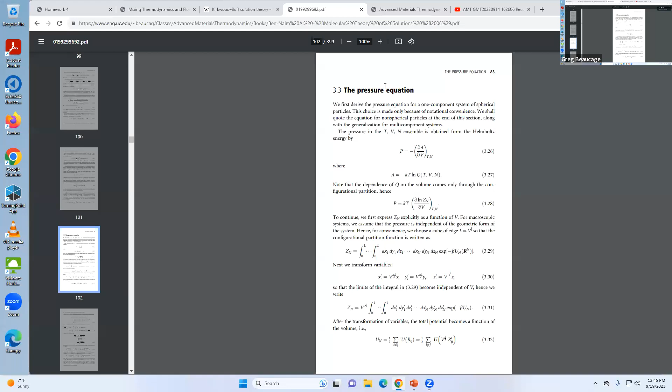But if you want to see how you get the free energy from the correlation function, the first step is to get the pressure, which page 83 does. And then he goes through the whole nine yards of it here. It might be interesting to look at, but it's not really necessary. He actually has a chapter, I think it's on page 111 or something. So if you want to know about correlation functions, this book is pretty good, but basically, unless you're doing computer simulations, you might not need to know about correlation functions.

The other place you might see them is in thermodynamics from distribution functions. That's section 105, which basically answers question 1 if you wanted to, but it's a book, so you couldn't really put that in the answer sheet. So anyway, the other place for correlation functions: the Fourier transform of the correlation function is like the diffraction pattern. There's a couple others, but basically simulations is the main one.

Like you're stuck, you have molecular dynamics, it's easy to do, plug and play, you let it cook, it comes out with the answer. Then what do you do with it? So then the next step is get a correlation function. So it's a way to get an answer from this kind of video game kind of thing, in a sense. I mean, it's nice to see a movie of the molecules moving around.

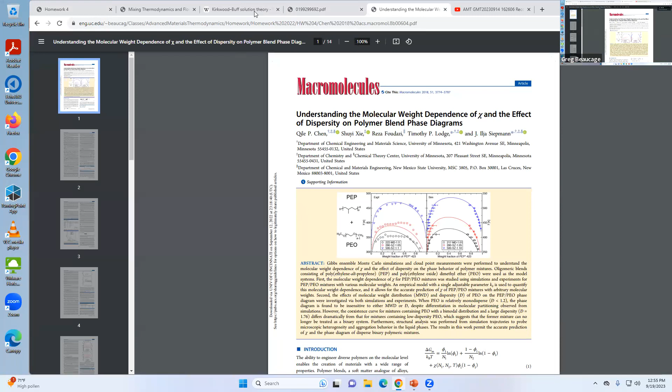Well, no, you're right that Chen's talking about molecular weight. In fact, the paper I gave you, I don't think it's this 2018 Chen, right? I think it's a different Chen. Is this really 2018? Yeah, but the Chen that he references isn't this Chen, I don't think. So he's saying Chen et al. Is that 2018? Because this Chen isn't talking about the same thing. It must be one of the first references here, right?

Oh, it said right there what it was. Chen et al. 29. A lot of Chen here. So it is that paper. The paper's different, right? He's not looking at the same system, even, I don't think. See, he's doing PEP, not polyethylene. So it's polyethylene propylene. That's called EPR, ethylene propylene rubber. So you have blocks of ethylene and blocks of propylene.

The propylene crystallizes; the ethylene, if it's small enough blocks, doesn't. So you get rubber reinforced polypropylene. And you can extrude that, so it's a rubber you can extrude. You can injection mold rubber parts with it. And it's just polyolefins, so it's cheap. That's a popular polymer, but that's not the same. He's doing polyethylene without the propylene part. Somewhere in here he must say without the propylene to compare it, because he's taking data out of this to compare.

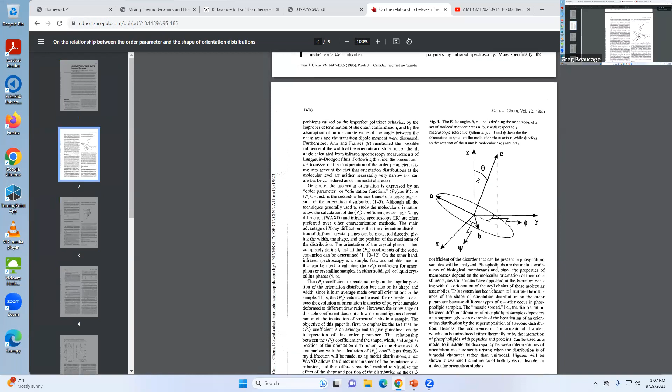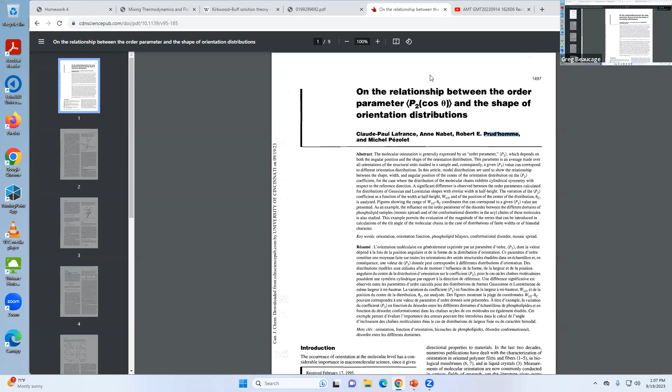So who did this? Someone that had a lot of time on their hands. Oh, Laval. Okay, I know this guy Prud'homme. He's retired now. He moved from Laval to University of Montreal. He wrote a paper on it, I guess. What journal is this in? Printed in Canada, so it's the Canadian Journal of Chemistry. Prud'homme's a really nice guy. There are two Prud'hommes. One was at Princeton, I think he's still alive, a polymer rheologist. And this Prud'homme was at Laval, a French-speaking Quebec City university.

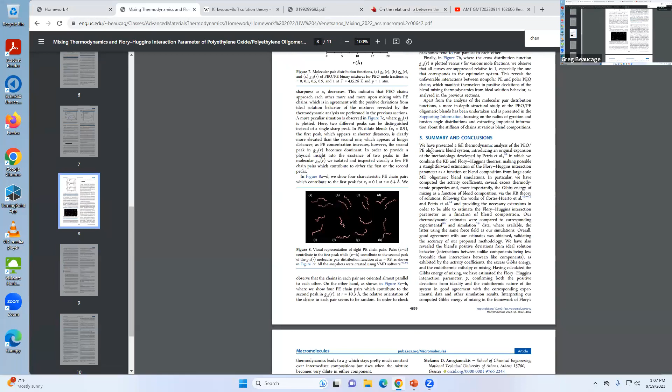Then he moved to University of Montreal, also a French-speaking place. But anyway, French people like French people, which is always odd because I'm like 1/4 French. So I don't really identify much with it, but if you go to New Orleans or Baton Rouge, all of a sudden you get the best hotel room, everyone treats you nice, and it's really pretty weird. Same in Montreal or Quebec, you go up there, all of a sudden you're special.

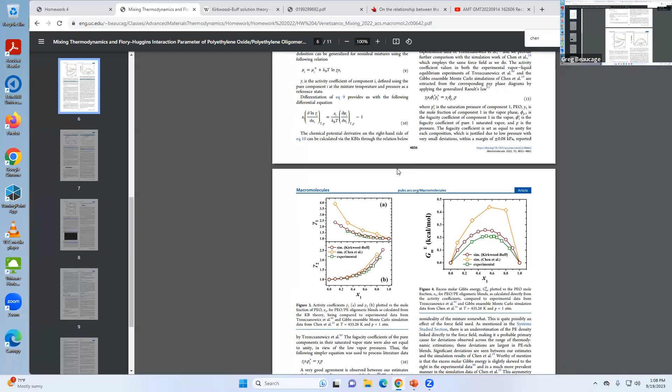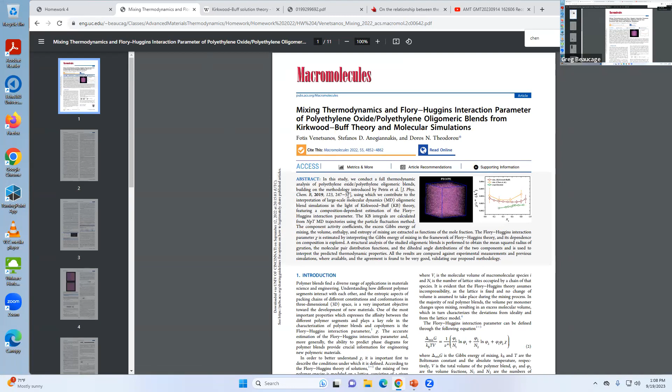So anyway, any questions on that? Anyway, everyone did bad on it. A couple people got over 100 slightly, but they also lost points on other things. Like for this business, there's a plot of gamma versus composition in every paper and also in the notes, where it shows the intercept at 0 gives a 1, and then the intercept of the other one's Henry's law. So you need to just say Henry's law, Raoult's law, and show that plot. I gave them 3 extra points for that because it was exactly the way I would have answered it and the way I would have wanted them to answer it.

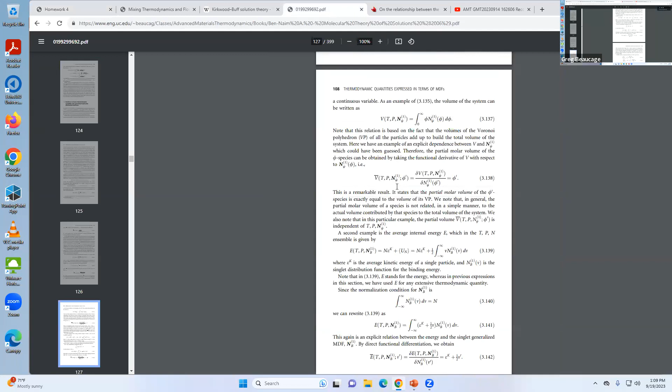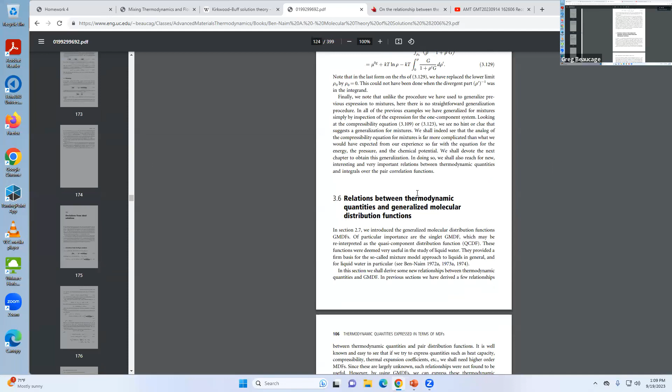Even if you look in this, I noticed this name NAIM, I guess that's how you pronounce it. He's got those plots in this book too, the plots of the gamma versus composition, showing the Henry's law and the Raoult's law limits. So literally everyone shows that plot to answer that question. One group did it, so I gave them some extra points. You didn't have to, but basically that was an exact answer. And someone else got extra points for something else like that. So that's about that. Any questions on this stuff?

So, right. So anyway, we got phase diagrams. This is the eutectic phase diagram. That's the workhorse, the bread and butter phase diagram. So the question is partly, where does this come from? In other words, we've done this ln x thing with some interaction parameter, an entropy, enthalpy equation for mixing of things. And then all of a sudden you get this thing that doesn't look anything like it, right? Nothing to do with it at all. So surprisingly, you can get this thing from exactly that same simple approach.

What you do is write the free energy for each of the different phases. In this case, you have copper crystals and silver crystals, both FCC. They don't co-crystal. You can't put the copper into the silver crystal, so they don't make a solid solution. It's possible to have a crystal where one metal fits into the other because the sizes are within 15%, and a couple other criteria, and then you could have a solid solution where you throw in as much of either as you want and have a single crystal structure. The lattice spacing changes a little as you change the composition, like brass. Silver and copper don't do that. The two crystals are separate. They're different sizes. They don't fit together.

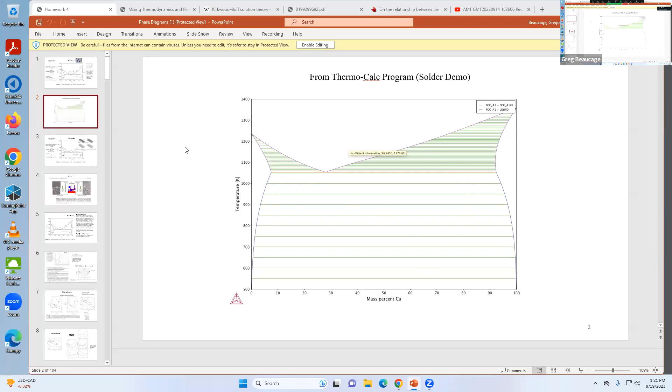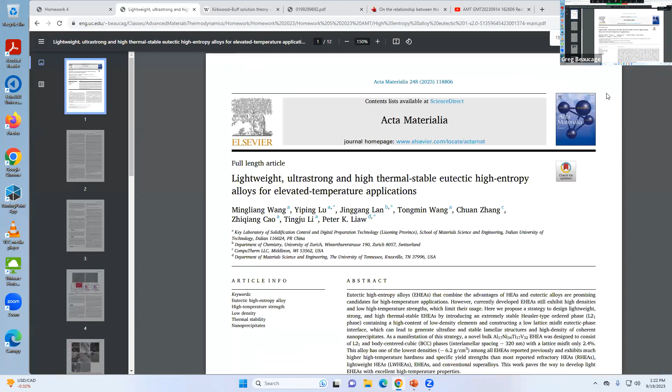Let's see, I wanted to show you some more complicated phase diagrams. I know there's some in here. Well, there's the high entropy alloys in this paper. These are things I was looking at for the homework. High entropy alloys, it's the same thing. It's got 5 components, same stuff. 4 or 5 components, I think you have to be 5.

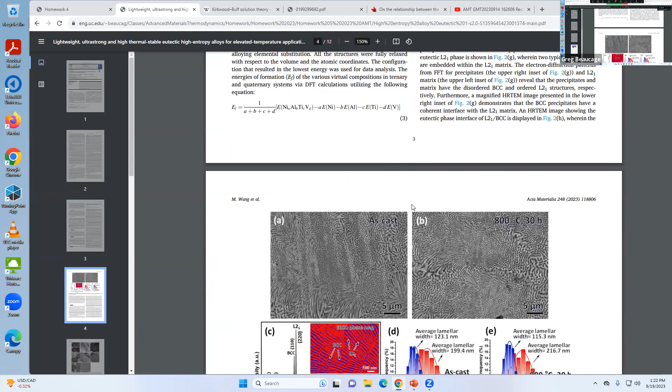Anyway, so this is what you get. This is a eutectic composition. When you get to the eutectic composition, you get these weird striped, or needle-like, a variety of tiger skin looking structures. So you can tell when you're at the eutectic. If someone asks what composition this comes from, you can say this is from a eutectic phase separation. Because at that point, let's see if I can get back to this guy here.

So at the eutectic, you don't have like a matrix of one and a matrix of the other. You're making both things at the same time. Right, so you're going directly from liquid to the two things. So there's a diffusion issue. You're going to have normally fluctuations of copper and silver, regions where they're higher density. And then when you get to the eutectic, all of a sudden it just wants to, boom, go to

these two solid phases. So the atoms of copper and silver have to diffuse over to find their partners and then form up the phase. So there's a kinetic issue of them getting out of the way and then forming these structures, right? Equilibrium structures. So how fast can they get to those things?

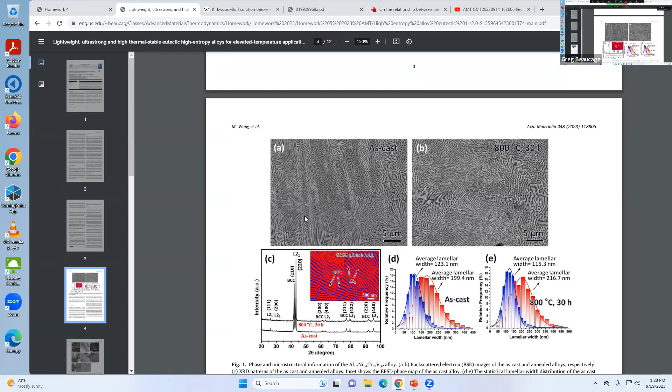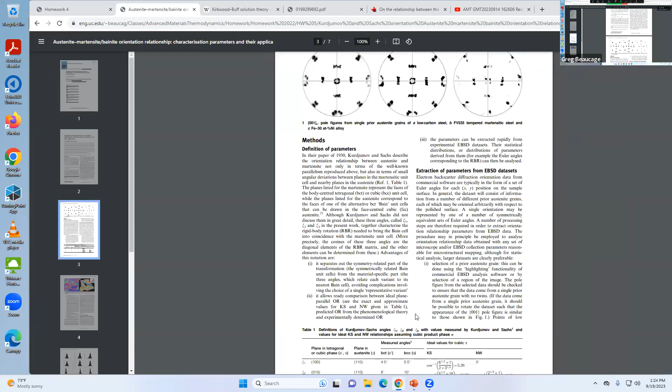So anyway, I'm not sure if the phase diagram for this thing is here. This should be a complex phase diagram though, but let me show it. They show a eutectic in it, but I was searching for eutectics. I got these weird... Somewhere in here, there's some really complicated phase diagrams. Let me just look for a second.

Anyway, the eutectic's the one, like if someone asks you questions, that's the one you absolutely have to know. Just the steel phase diagram is pretty good, but I don't think I have it here. Not sure why.

Right, so this is an important one because it's how you make steel. You put a little bit of carbon in the iron and make something nicer, right? Harder, less prone to corrosion, things like that. You put some chromium in. Anyway,

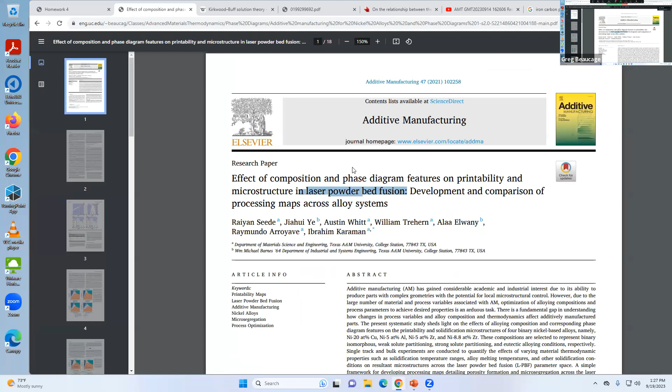So basically, these things are like magic compositions where the thing clicks together. And at that point, it's as if it's a pure component. So the intermetallics are all over the place in this phase diagram. In this paper, they're doing laser powder bed fusion for 3D printing. So you put the powder down, you cook it with a laser, and you see what comes out. So you can imagine you can get a lot of different phase behavior in that situation.

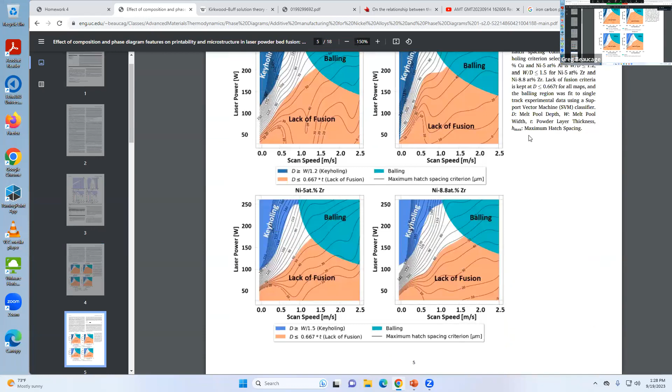So they go through different compositions to determine what comes out. They create these phase diagrams with CALPHAD or something, right? And then they go and make the stuff at that composition. So they do the kinetics and the thermodynamics together. It's a pretty good paper, but I picked a different one this year.

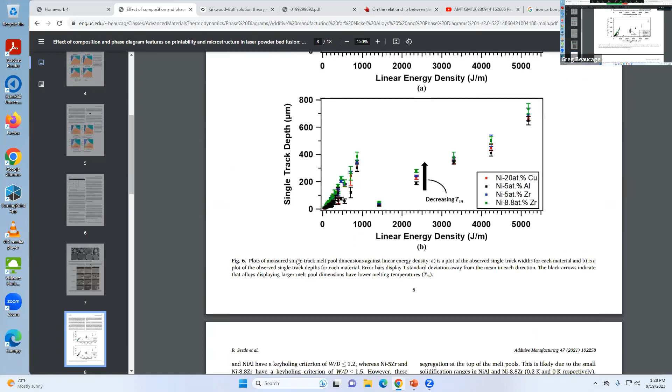So anyway, then they do polishing and they get images of it and they try to determine what's in that. You can do it optically. You can also stick this in a TEM and determine the crystal phases, and the composition, like EDX to get the chemical composition of each of the spots in it.

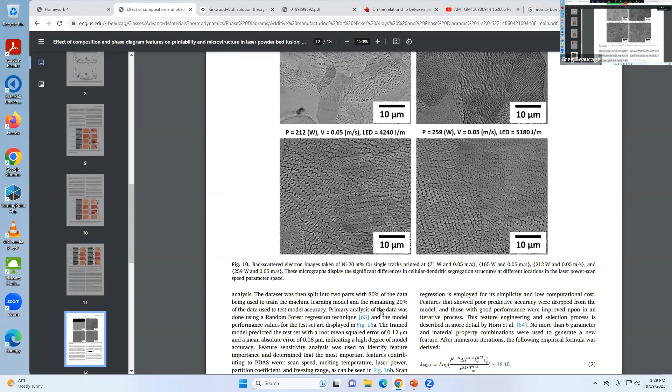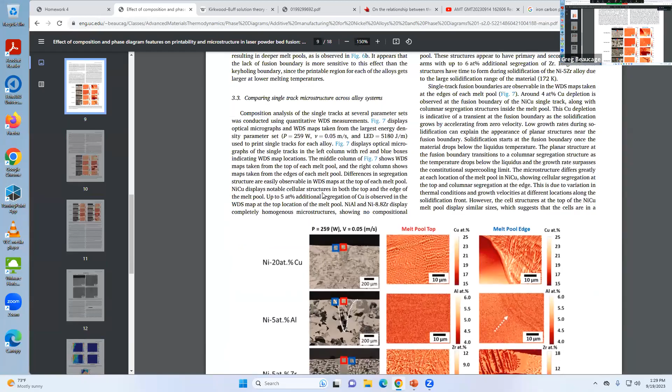So a lot of the analytics for metals is based on stuff like this, like trying to determine what phase is in equilibrium with whatever else is in there and how that thing grew. This is a pretty good example of the mess you can get into, right? And how you kind of resolve it as best you can. In this case there's the thermodynamics, which is your roadmap, and then there's the kinetics that decides what really happens, right?

So depending on what happens when you shoot the laser at the powder, you can get holes forming in it. That's not good. You want it to be solid. They can ball up instead of making a solid piece. If it doesn't melt, then it's just still a powder. So there's all these problems that happen because of the scan speed of the laser and the power that you put on the laser.

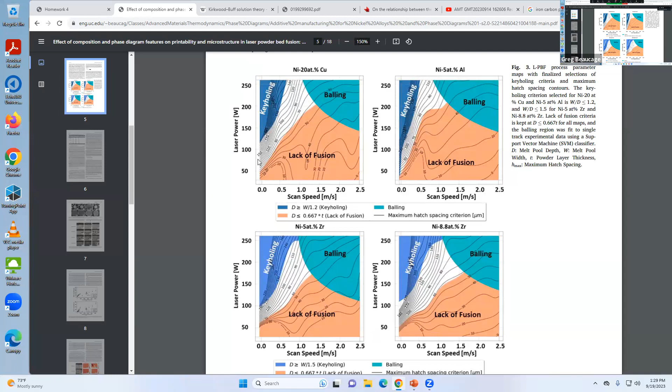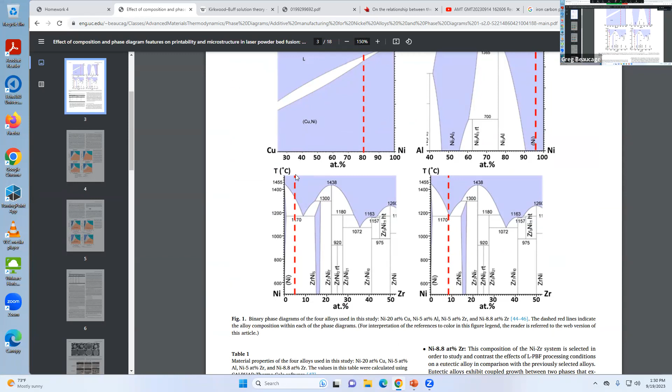So this is a kinetic mapping of what happens. You take that kinetics and map it up with the thermodynamics, and say what comes out as a combination of the two. Did I melt it enough? Did I cool it fast enough? Did I get the phases I want? Right, so anyway, that one's a good example of how things can get more complicated than this. But the eutectic is the touchstone, everybody has to know what it is.

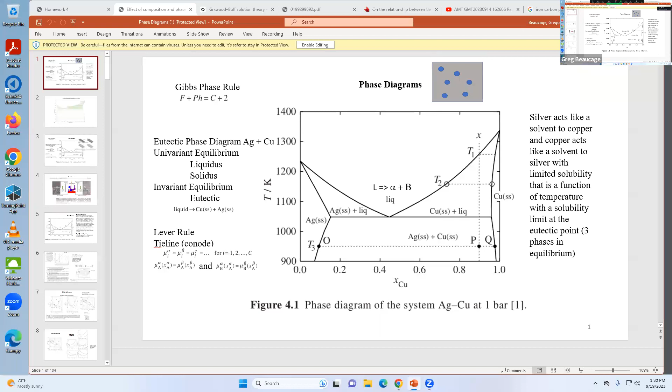Right, so lever rule, liquidus, solidus. That's liquidus. Solidus is when you get to the solid phase, so it's that line. Invariant equilibrium means you're going from this composition directly into the same composition of the two. And then lever rule, tie line. That's slide 1 of this stuff.

The flat line between the pure copper and the silver, the completely horizontal line, is that also a solidus line? Yeah, the eutectic line. I guess it's a solidus line. Usually if someone says in a paper along the solidus line, they're talking about this line. If they're talking about the eutectic, they would say the eutectic, but it is a solidus. So if it was a trick question, yeah, that's a solidus.

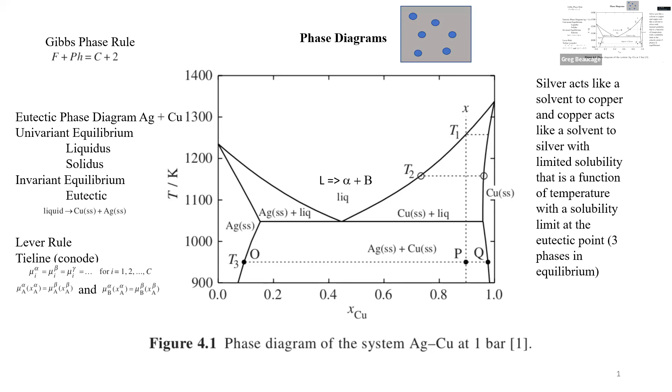So it's basically terms of the trade. In the past I've given a homework to use this, but you can play around with it. It's on the web page. With the free version of Thermo-Calc you can only do steel and solder, a couple demo examples. You can't reproduce this silver-copper thing, which would be nice. That's why I have solder here.

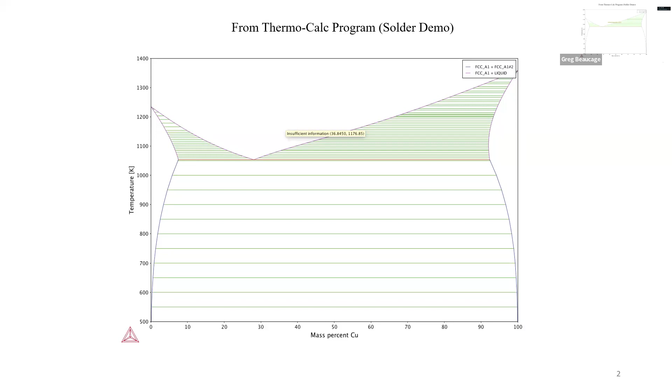So basically you have to pay something for a license to Thermo-Calc. Has anybody used it here? There might be a license for it if you want to use it. Someone has it, only Matt Steiner knows where, because I'm not a metallurgist. Peyton might have it. Anyone that looks like a metals person, ask them. But the free version is okay too, to get a feel for what you can do.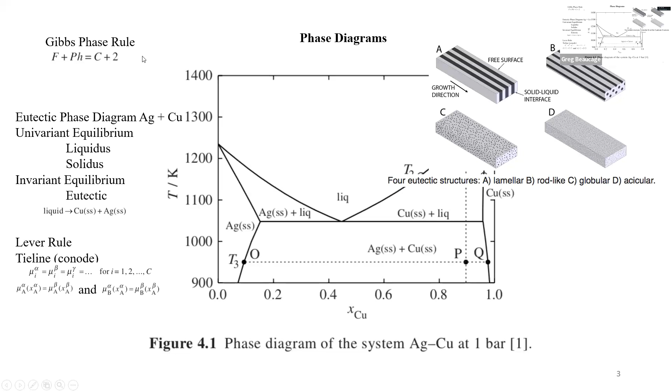This is showing what you can get with the eutectic: lamellar structures, rods, acicular, which are fibers, and globular, which is a spotted thing like a leopard skin in the micrograph. So you can tell when you went through a eutectic; there's a signature like that. Here's pictures from another paper, also on the web page, claiming they go through the eutectic in these regions and get a tiger-like pattern. This is another laser scanning paper, from 2020; the other is 2022.

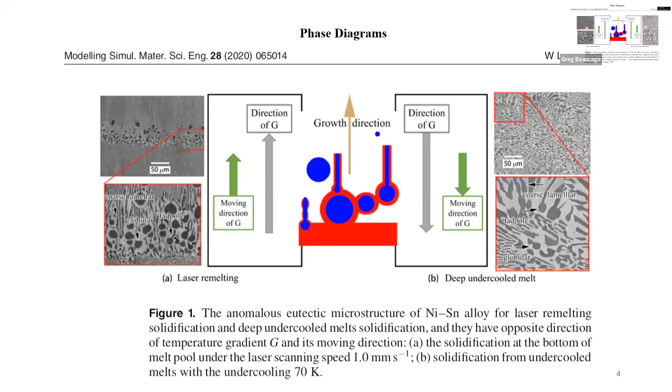Anyway, so yeah, I already kind of went through this business about following tracks along through the phase diagram. So the same thing happens with polymers. In a sense, polymers are almost always going to be a liquid-liquid phase separation. So it's going to look like just a simple binodal, spinodal kind of thing, right?

So again, actually, this is shown a lot better in that theme book. I was just looking at this, but this plot doesn't really do you much justice. Basically, this is going to be like a U here and a U there, and at the pit of the U is the binodal. So that's going to be the compositions for the binodal. Each of these curves is at a different temperature, and then the inflection point in between, like here and here, is a spinodal.

So if you can see that's like a frown face, that means it's going to immediately separate. So if you get into this region, you have immediate separation. This part though kind of looks like a little smiley face on the edge. So that's like the single phase region. So that one is going to be metastable. Right, so that's this region B between the spinodal and the binodal. So this part is nucleation and growth.

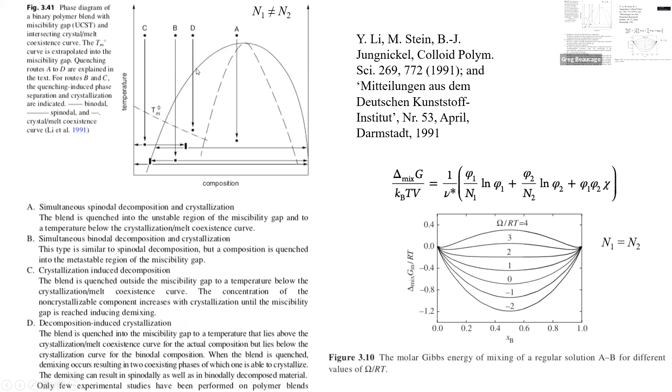Anyway, so that's how you do it. You use the same equation to get these curves, and then from those curves you can generate the phase diagram. Right? So that's the idea, how you get this thing and that thing. Like we saw, this is pretty simple. It's just one equation, and it's all liquid. And then this is 2 phases, liquid and solid. And then you have 2 curves, the solid and liquid mixing. And that can generate this.

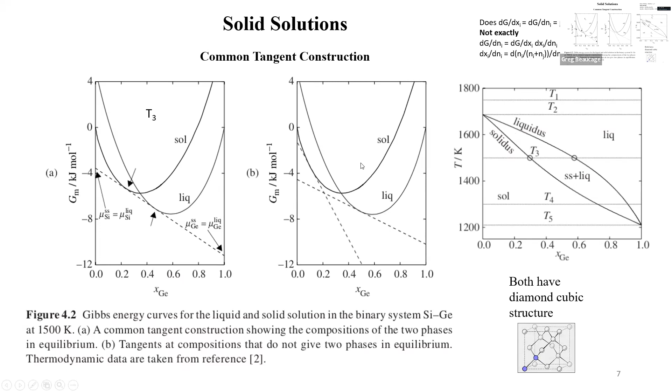So that's kind of the theme of this chapter, just how you can construct these complicated phase diagrams from free energy plots. This shows all the different temperatures, like T1, T2, T3, T4, T5, how the curves differ. So when you're at T3, you can get the 2 phases. When you're at T1, liquid is always lower free energy than solid. So T1 is always liquid.

T1, liquid's always lower than solid. So T2 is where they cross at 0. That's where that point is. And then T5 is where they cross at 1. And then T4 has 2 phases. So it's the same thing. There's a slope here that will give you the 2 points on T4, the 2 points on the phase diagram.

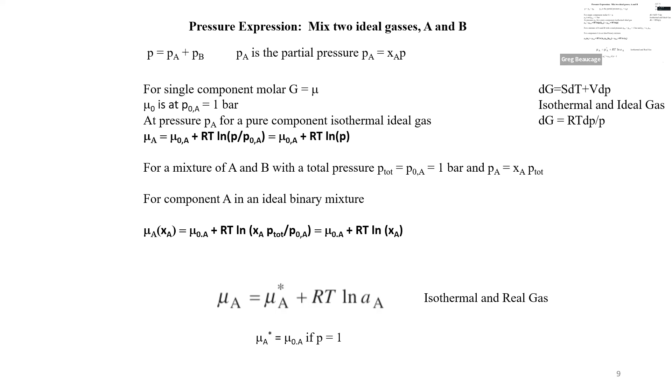So you can see it's just the same kind of free energy curve. It's just the temperature dependence is different for the solid and liquid, and that generates a phase diagram. That's how this thing works. Anyway, we can kind of leave that here, I think. Probably enough stuff for now.

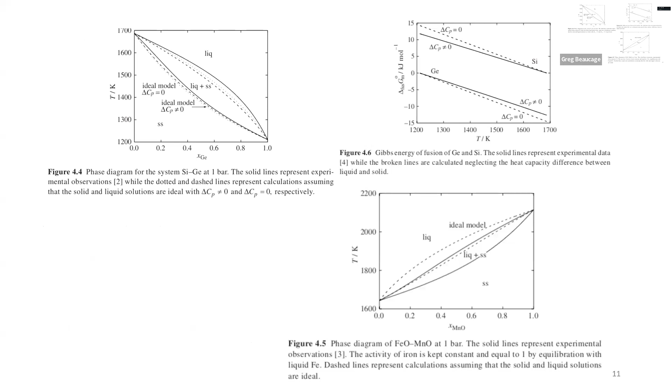Yeah, so we'll get all these. They kind of go through how to get up to the eutectic. This is like a simple solid liquid equilibrium. This is called congruent melting. Then that's eutectic. And if you did solution thermodynamics, like chemistry or chemical engineering, you didn't see any of these. But what you saw was basically this liquid, and if you had liquid vapor. Liquid is kind of like chemistry, I guess. Liquid vapor is like distillation for chemical engineering.

When you do that, there's the same things; something ideal is called ideal. This is liquid vapor, LV, this is liquid solid, SL, right? But the phase diagrams are kind of the same, right? Then this is called an azeotrope. So alcohol and water has an azeotrope, so you can only purify it so much. That's why you can only get grain alcohol to 90% or something. So basically there's a point of no return. These lines are following each stage in a distillation column.

So azeotropes are the same: congruent melting for liquid solid is vapor liquid for an azeotrope. So azeotrope is the most popular chemical engineering phase diagram, just like eutectic's the most popular materials phase diagram. Congruent melting isn't very popular in materials, but azeotrope is really popular in chemical engineering. Because if you're distilling two components, this is your dead point where you can't purify it anymore. Then you need to use membrane separation or some other thing.

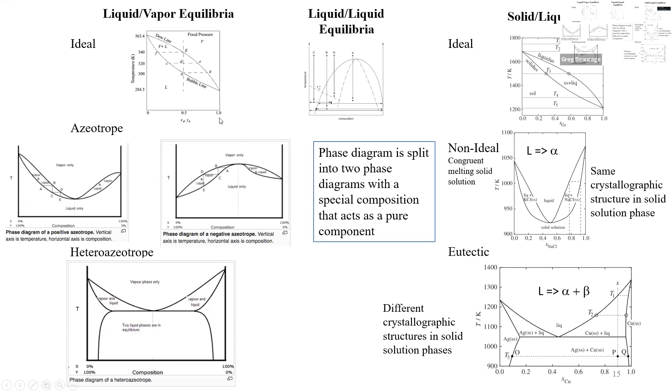In the end, they're all going to use the Hildebrand to construct these things. So it's kind of the same thing. Anyway, I thought I'd mention that. But polymer is almost always like this phase diagram, and metals is almost always eutectic. And these guys are always azeotropes.